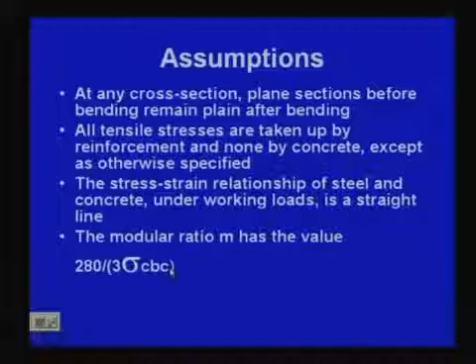The modular ratio M has the value 280 by 3 sigma CBC, where sigma CBC is the permissible bending stress in compression of concrete. So these are the 4 assumptions, and you can get them in IS 456 also.

I am not going into detail since I already listed this table in the last lecture. I've written it in complete form, and you will get it in IS 456 also. I have given only those values we generally use; most cases we use M20 and M25.

Permissible stresses in concrete are given for 4 grades, M15, M20, M25 and M30, covering bending compression, direct compression, and average bond stress in tension.

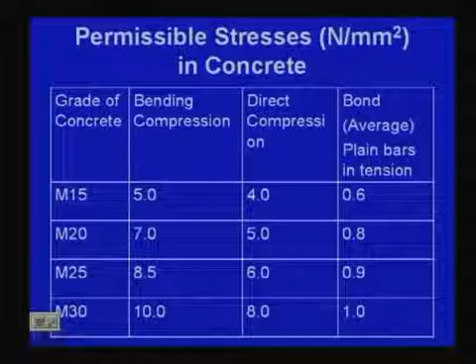Whatever the case, whether compression or high yield strength deformed bar, we have to apply a multiplication factor to get the required value. That is the standard procedure: we start with one value and multiply by a certain factor to get the required value, which I shall explain when we come across those problems.

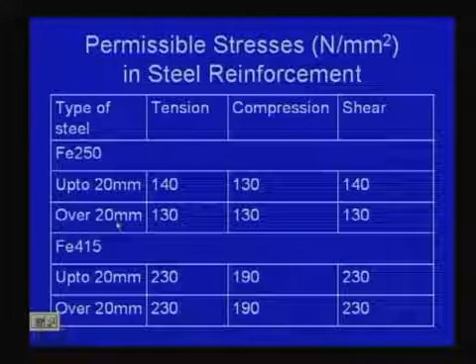For permissible stresses in steel reinforcement, this table also I have given, and you will find a difference particularly for Fe 250 mild steel: up to 20 millimeter diameter there is one kind of stress pattern, and over 20 millimeter diameter another. I already told this in the last class.

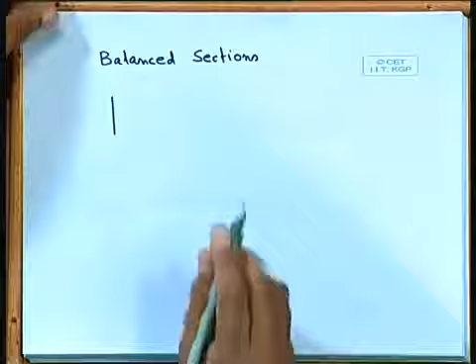Because we can find out the steel also. Let me go back to the few previous slides. Yes, so this is the one we are interested in.

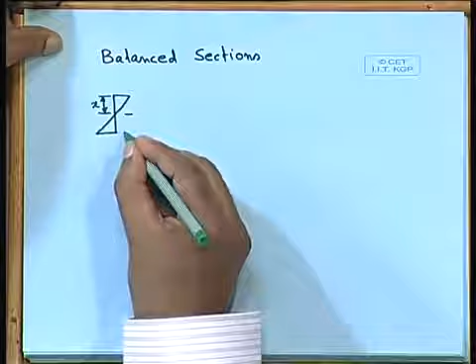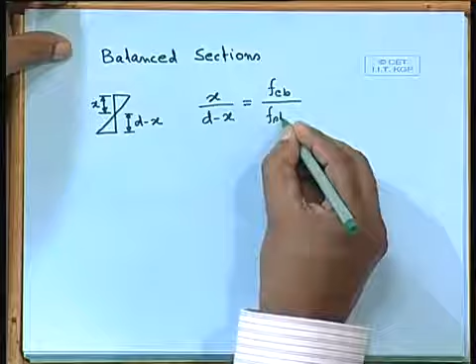So x and this one d minus x, this is x and this is d minus x. Now let us find out, or we can write down here also, at least for this page. We are talking about this x and this part, effective depth, d minus x. So we can write down FCB at the top, and we can write down KD, x equal to KD, so that I am writing here.

And M FCB by FST. So we can write down K equal to, let me make it, you please check it, because we are not going into detail of that calculation. And j equal to 1 minus k by 3. So for the balanced section we can find out k, that is kd. That means if we know FCB, FST, and m, obviously we can find out m equal to 280 by 3 sigma CBC. We should remember this one.

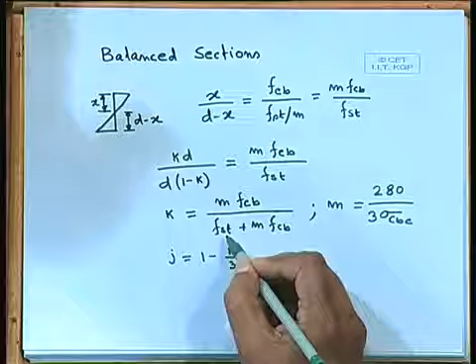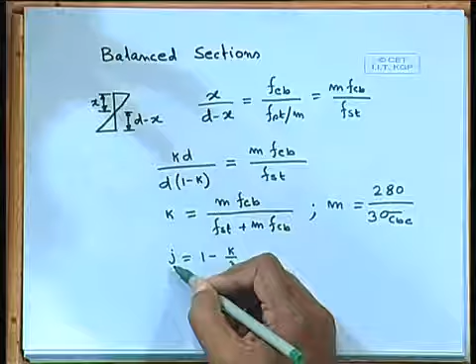FCB means sigma CBC and FST means sigma ST. So for a particular grade of concrete and a particular grade of steel, we can find out the value of K, and if we know K, then we can find out J also, and if we can find out J, then we can find out JD, and then we can find out the moment of resistance, all those things we can calculate. So here FCB, FST, those are limiting permissible values, and we shall get them from the code, because our code gives permissible stresses for a particular grade of steel, for a particular grade of concrete.

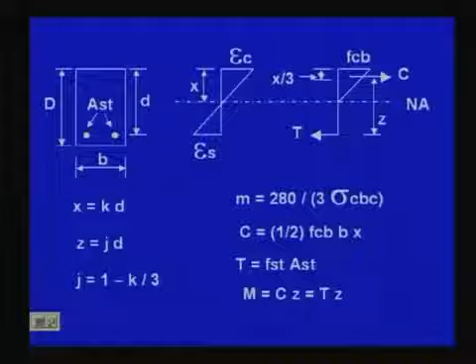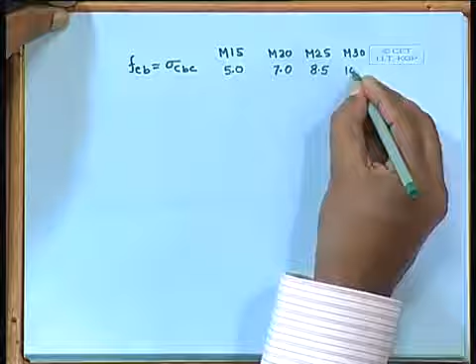So let us see, let us write down FCB equal to sigma CBC, and let us make it here for M15, M20, M25, M30: 5.0, 7.0, 8.5, 10.0. So these are permissible stresses for different grades of concrete.

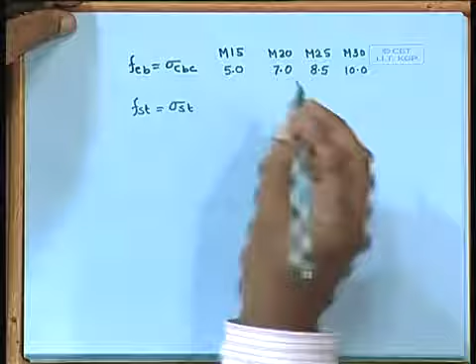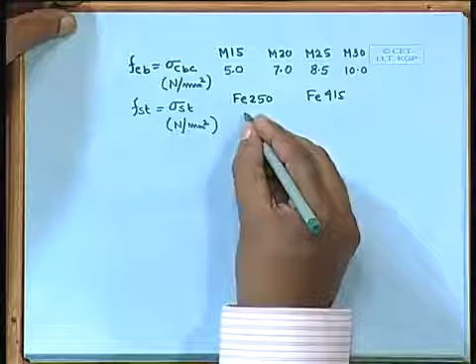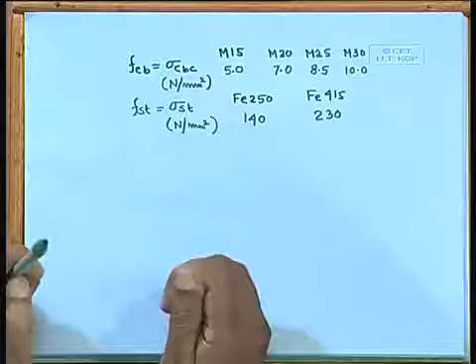FST for balanced section, it should be sigma ST. Let me complete this one with the proper unit, Newton per square millimeter. So for FE 250, FE 415, we have 140, we have 230. There is one more grade, that is FE 500, and that also we can use, but I am giving only those because you can get those other things in your code. In this particular class, if we cover each and every numerical value, it will be difficult to cover all those things. So we are only using the grade of concrete and steel which we generally use, and others, say FE 500, you can get in the IS code. So IS 456, you can find out, and there you can get the detail.

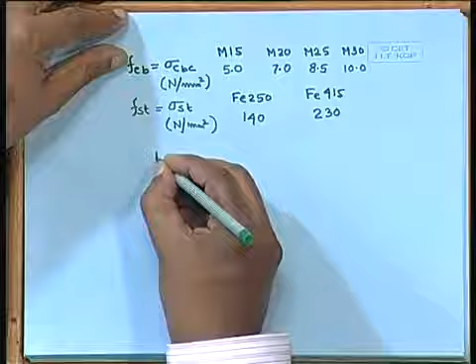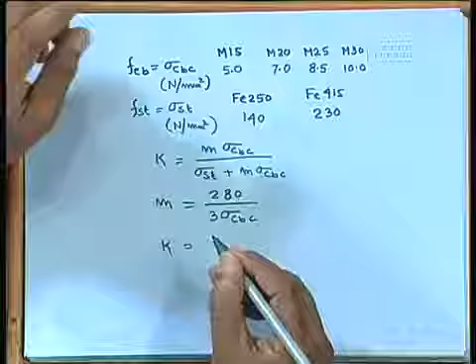So K equal to M sigma CBC divided by sigma ST plus M sigma CBC. I repeat once more, M equal to 280 by 3 sigma CBC, and K equal to, please note there is one more K that will come, that is capital K. But for this time we are only working on small k, that is KD.

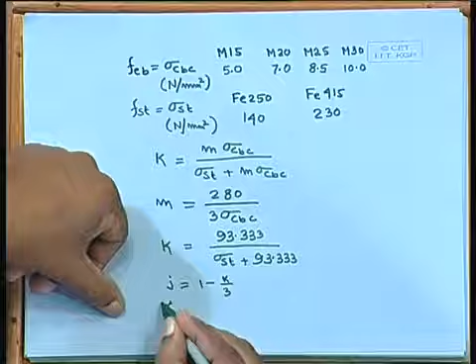So, that one comes as J equal to 1 minus K by 3, and capital K equal to Kj by 2, and moment of resistance M, that one will be equal to capital K sigma CBC B d square. So, m equal to capital K sigma CBC B d square.

This K, that is one factor. If you remember, for homogeneous rectangular section, in the last lecture we have found that is 0.167 times the stress times B d square. So, here also this capital K also we shall get similar type of fraction. So, let me go a little bit faster here.

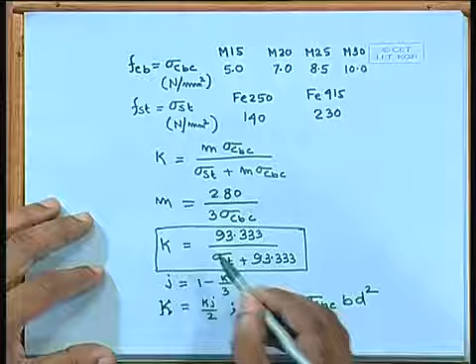Okay, so we can find out beam factors for Fe 250, that K we can find out for different grades of concrete. K you can find out that all of them having same, because for Fe 250 please note this equation: you will find it is independent of sigma CBC, it is independent of any concrete value, we are getting only sigma ST. So that is why for any grade of concrete you will get that K same, and you can calculate J, you can calculate capital K.

So, if we come back to this beam factors table, the small k, which is the factor of KD, from where you can get say 0.4 times small d, that effective depth. So, we shall get X, J which will give me the lever arm, and capital K, that coefficient you can get 0.174. So all of them we are getting 0.174, and this one for mild steel. So, this table for mild steel for Fe 250, and I have given only M15, M20, M25, 30 just to show that for all grades of concrete we are giving the same value.

Next one, that is for Fe 415. Fe 415 we are getting that K 0.29, J 0.9, capital K 0.131. So, this value you will get it say 0.167, the one we have told, and here you are getting 0.131, the other one you are getting 0.174. So, that means approximately, that is not a bad choice, one can also get some kind of result even if you consider homogeneous, but obviously it is not the correct one. So, the correct one is what we are doing now.

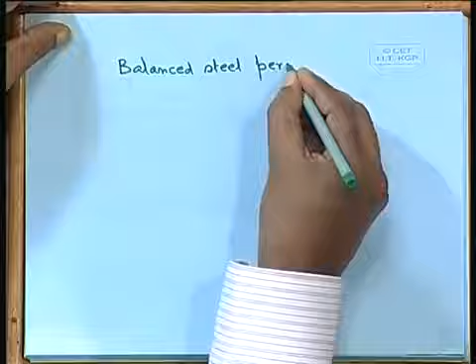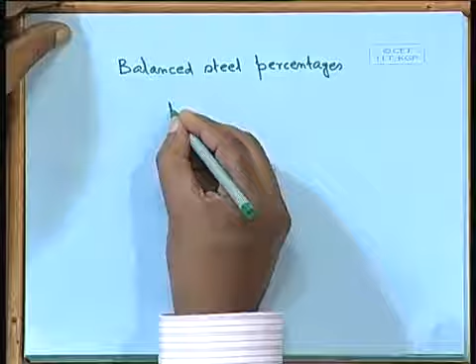So, if we say PT or P, whatever we consider, P equal to 100 AST by BD. This is the percentage of steel what we are considering, and so AST equal to... so we can equate forces.

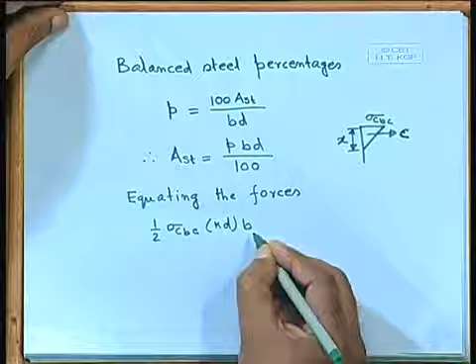Half sigma CBC times KD times B. This is the compressive force, B times X, that we are talking. So this is the force C, and this is sigma CBC, this one X, width of the beam that is B. So I can get capital C half sigma CBC KdB, x is nothing but Kd. That we can get, which should be equal to P by 100, we are talking percentage of steel, P by 100 BD times sigma ST. So, this is the area of the steel times sigma ST will give me the tensile one, this is the tensile force T.

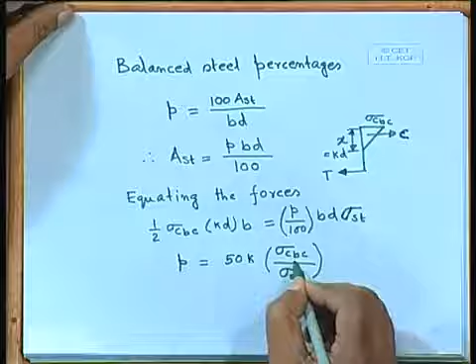So, from here what we can get, P will be equal to 50 K times sigma CBC by sigma ST. If we just rearrange it, so P percentage of steel will be equal to 50 times K sigma CBC by sigma ST. I know that K, so I can calculate that balanced percentage of steel. So I can get the balanced percentage, because this sometimes required that you can approximately find out also, considering sigma CBC and sigma ST, you can find out K, and then immediately you can find out that P also.

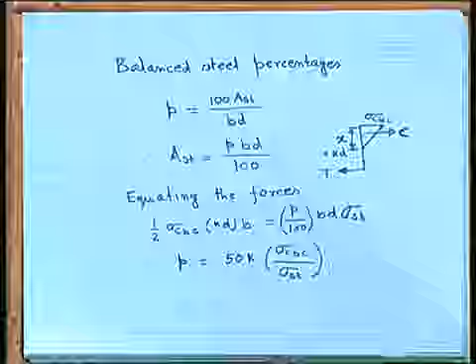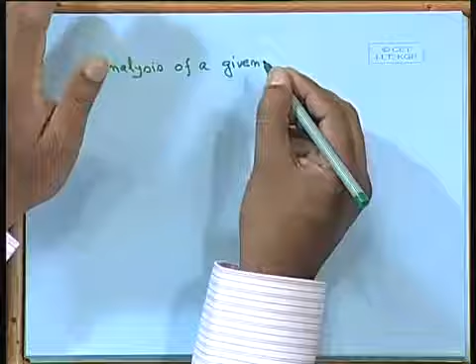Analysis means that when the section is given - reinforcement, depth, width, everything given - then we call it analysis. We are analyzing how much load it can take, what is the moment of resistance. Design means your moment is given and you have to provide the suitable section - that is called design. So here we are doing the analysis of a given section.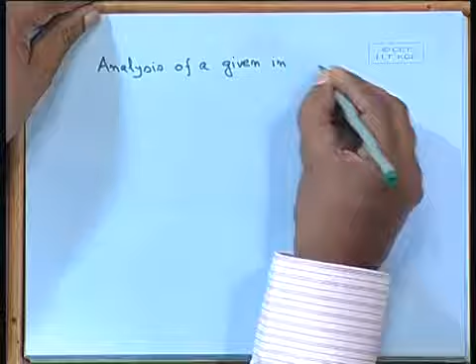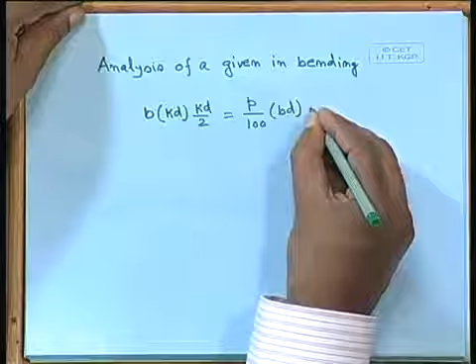We are talking bending only. So we can take the moment about the neutral axis, so this one we are taking. What we are doing is considering the neutral axis somewhere here.

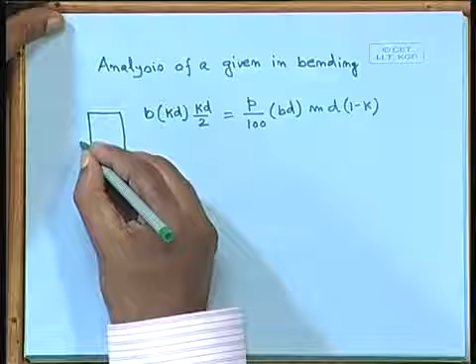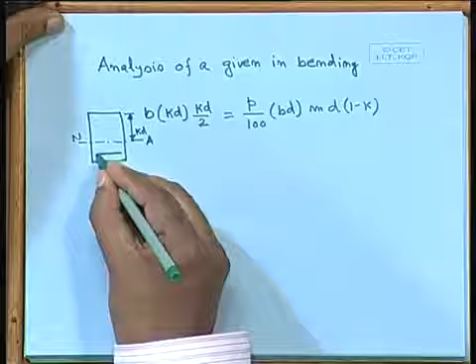This part is kd, area of steel somewhere here, and that distance is d minus kd.

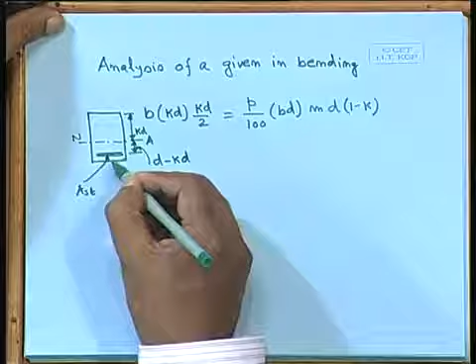So this area of concrete, we can get the area B times kd by 2. I am taking the moment of this area with respect to this neutral axis, because we are considering that equivalent section.

That is why you multiply - this is the area of steel, P is the percent of steel, P by 100 times BD, because we consider percent of steel with respect to the width and the effective depth. Please note width times effective depth, not the overall depth, because there is another term, capital D, called overall depth, but we are not considering overall depth.

Whenever we consider the percentage of steel of a particular section, we take B times D. So B times D multiplied by P by 100 gives me the area of steel, multiplied by m gives me the corresponding equivalent concrete section, similar to any composite section, like wood and steel bar which you have done in first year class.

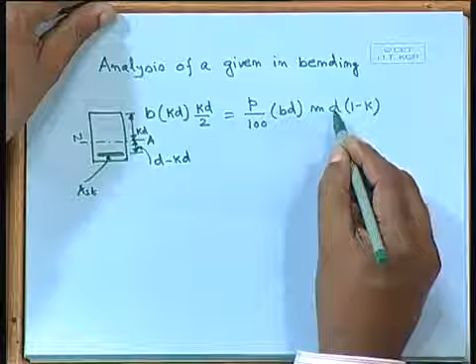Either you make that steel bar equivalent to wood area, or consider wood as steel. So wood will become thinner, but if you convert steel to wood, it will be bigger. Here we are considering the same way, multiplied by d times 1 minus k, that is the distance, and we shall get this equation.

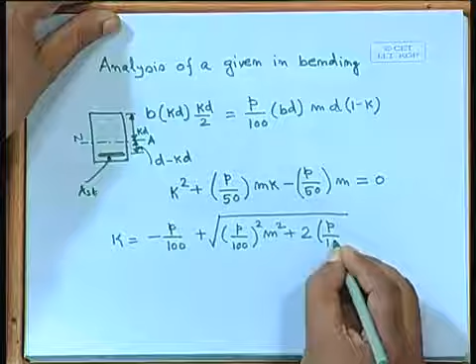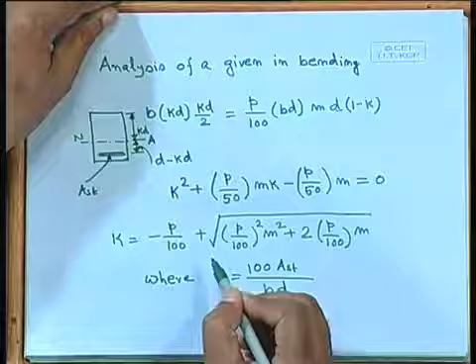From there we can find out k square, and as done in the last class, k equals... last class we called it the reinforcement index, and here we are talking percentage of steel, where P equals - we can write down P equals 100 AST by BD, and from there we find the corresponding K. If area of steel is given, we can calculate that K.

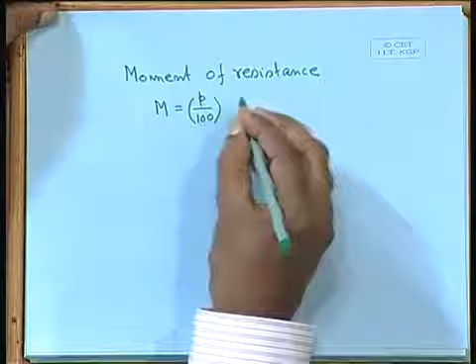So we can just repeat the moment of resistance. Let me write down moment of resistance: M equal to P by 100, B D sigma ST, D times 1 minus K by 3.

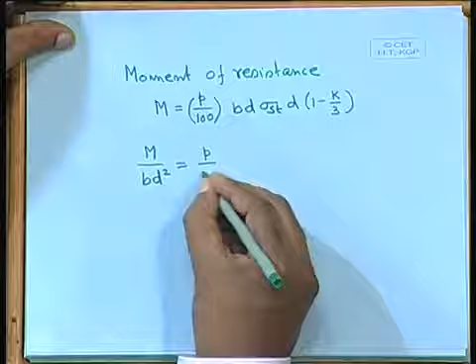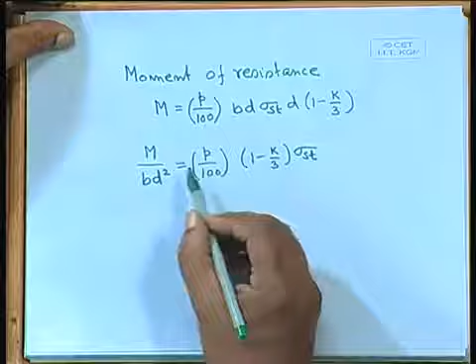Also we can write it in this way: M by BD square equals P by 100 multiplied by 1 minus K by 3, sigma ST. So generally in SP16, or any design aid, or you can make your own, we use this equation which is independent of B and D.

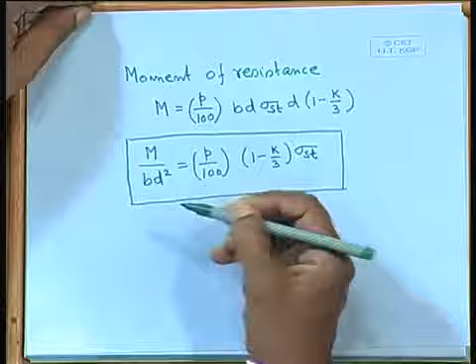We can get a curve or make a table, giving P for a particular grade of steel, and for different percentages of steel we can find the corresponding M by BD square. We can make those things ready and use them immediately, making the design process faster, since every time you need not use a calculator or computer. So you can make curves or tabular form, and immediately choose your section.

Okay, now let us do one problem. I hope we shall be able to finish it.

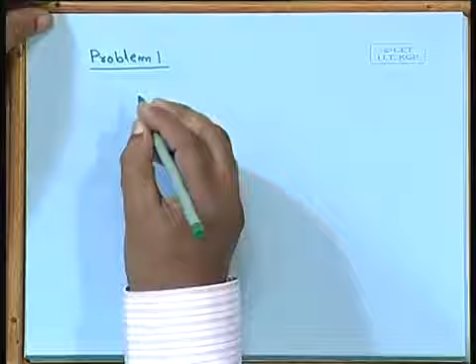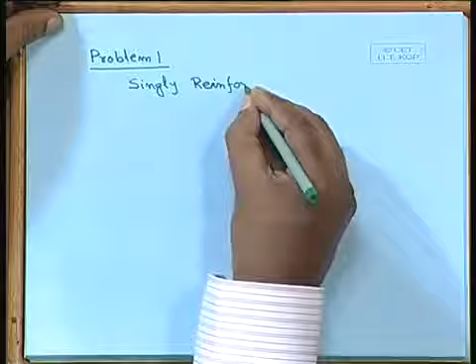Let us describe the problem first. Singly reinforced - please note, I have already mentioned the term singly reinforced, that means single. So there should be a term for something else, generally we have double.

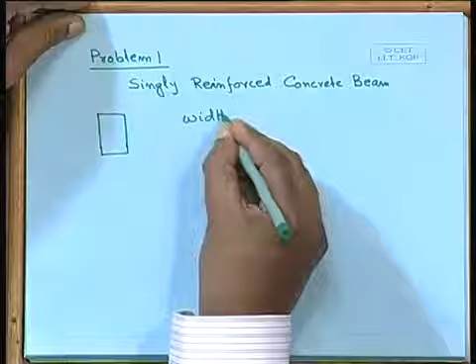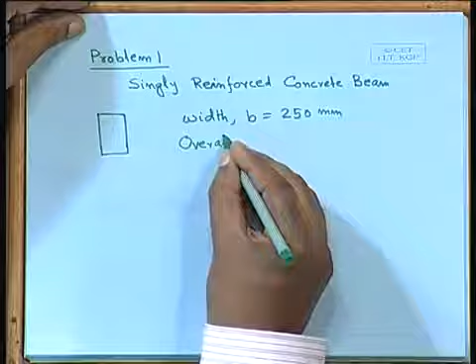So we are having one beam, width B 250 millimeter, overall depth 400 millimeter. Let us put it as capital D.

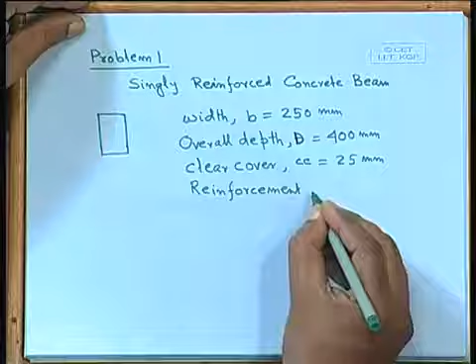Clear cover we shall consider, say CC 25 millimeter. Reinforcement phi - we designate phi, which if we specify phi, that means we are considering mild steel. There is one more actually, that I shall tell you in due course. And Fe 250 and M20 grade of concrete.

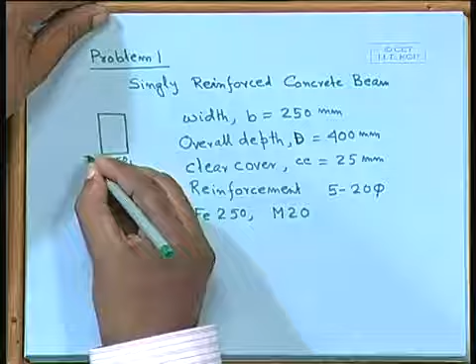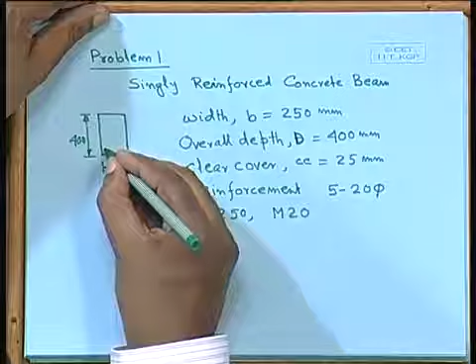So this is the description of the problem. This is 250, overall depth 400. There are 5 bars, 5 bars of 20mm diameter. So this is the problem we have to solve.

So sigma Fe 250, phi 20 millimeter, sigma St - it is up to 20 millimeter, so we have to use 140 Newton per square millimeter, not 130 Newton per square millimeter.

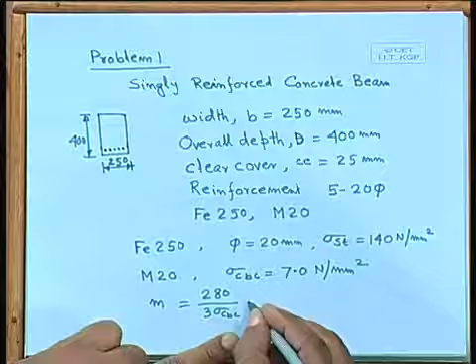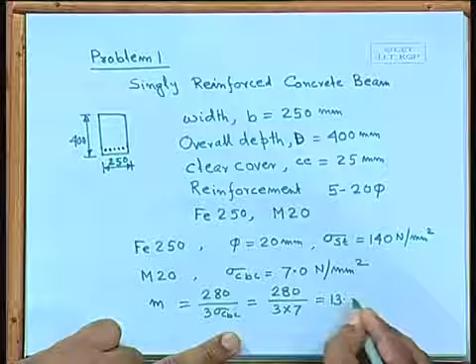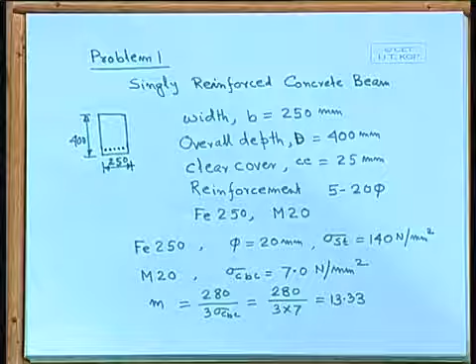M20, sigma CBC. So always you should write down first the values whatever you require, and M equal to - so we know M, sigma St, sigma CBC. So shall I continue with the next step? I think I can change it.

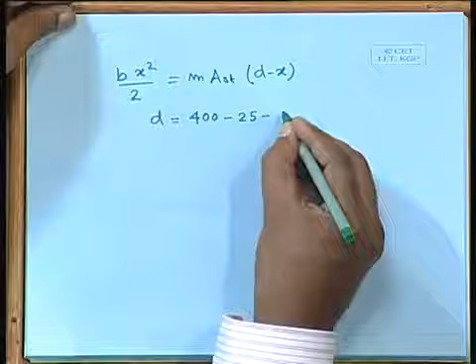b x square by 2, d equal to 400 minus 25 clear cover, 20 by 2, which comes as 365 millimeter. So 250, m is 13.33.

Area of steel, let us calculate here. Five, pi by 4 into 20 square equal to, so 5, that comes as 1570 square millimeter.

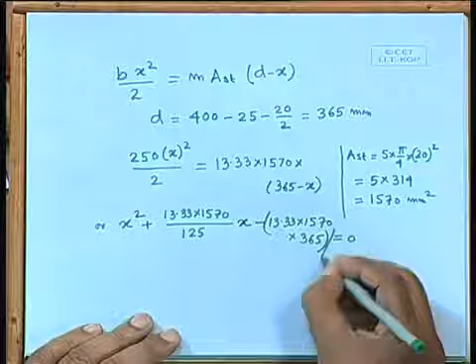Or x square plus 13.33 into 1570 divided by 125 times x minus, so I think I have to calculate it, divided by 125. Okay, or x square plus, which is coming as 167.42 x minus 13.33 into 1570 into 365 divided by 125, which is coming as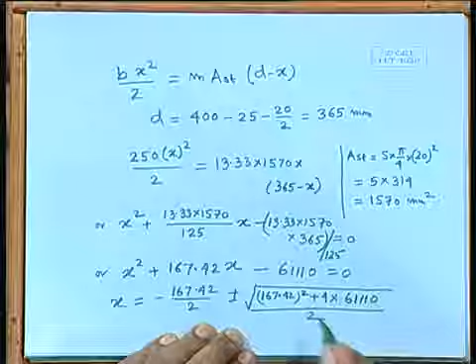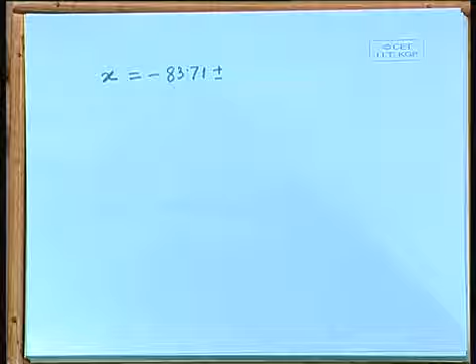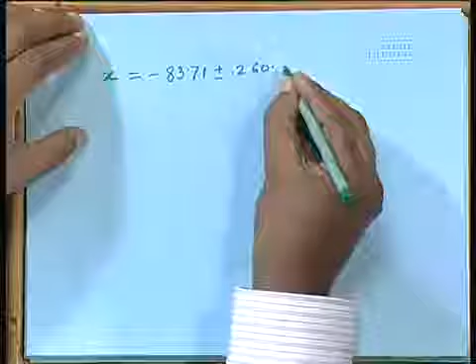So x will become 261 minus 83.71. So 177.29 millimeter. Okay.

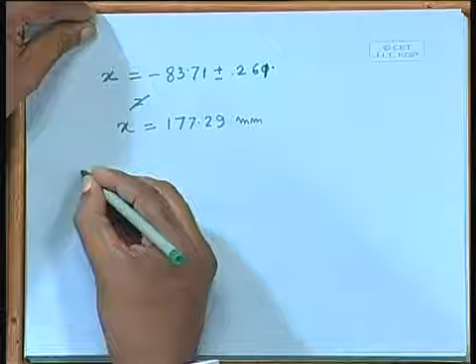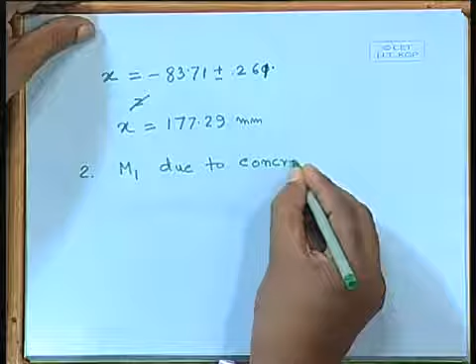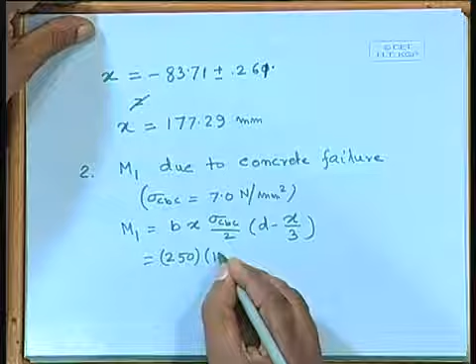So we can write down M1 due to concrete failure, sigma CBC equal to 7.0 Newton per square millimeter. M1 equal to B x sigma CBC by 2, d minus x by 3, equal to 250, 177.29 times 7 by 2, 365 minus 177.29 by 3, equal to

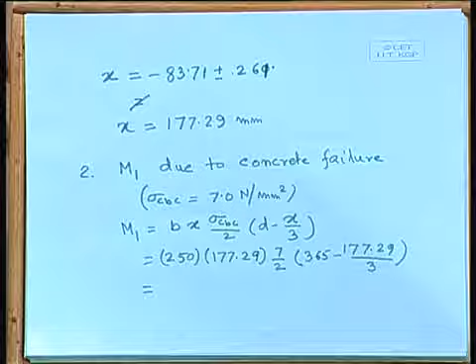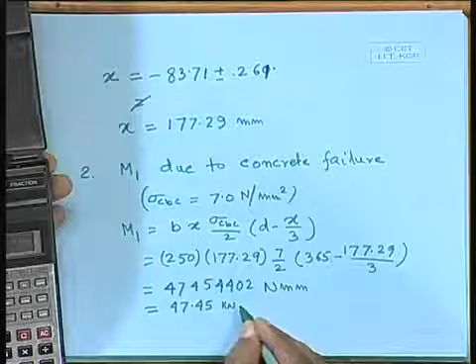5 minus 177.29 by 3. So 305.9 into 7 by 2 into 250 into 177.29. So which comes as 47454402 Newton millimeter, which comes as 47.45 kilonewton meter. We get 47.45 kilonewton meter.

That is due to concrete failure. So we have to get the other one. So we can get it, the other one. So M2 due to steel failure. Here sigma ST equal to 140 Newton per square millimeter.

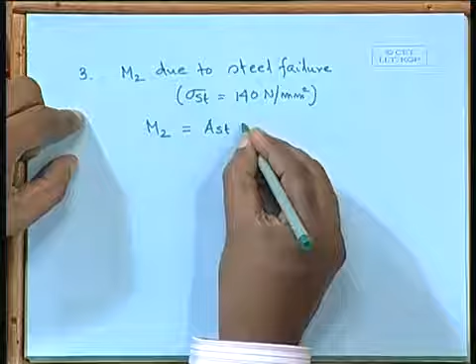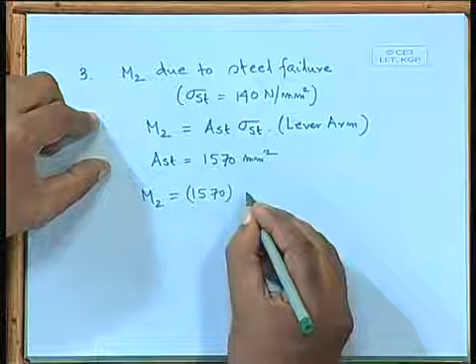M2 equal to AST multiplied by sigma ST multiplied by lever arm. AST equal to 1570 square millimeter. M2 equal to 1570 multiplied by 140 by 365 minus what was the lever arm, that 177.29 by 3, which comes as

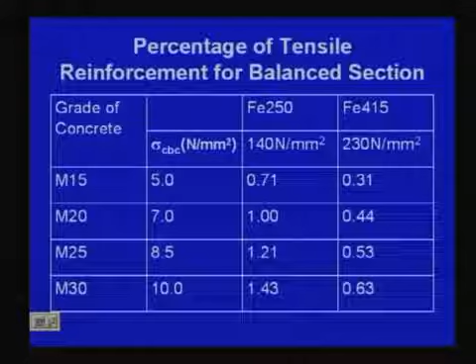So we are getting 67237553 Newton millimeter equal to 67.23 kilonewton meter.

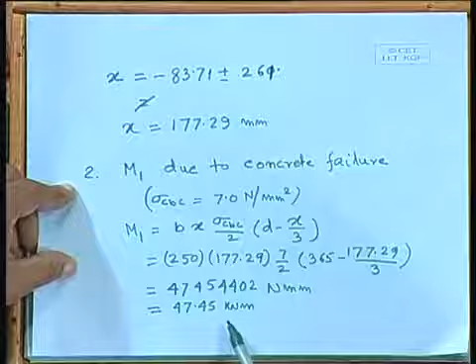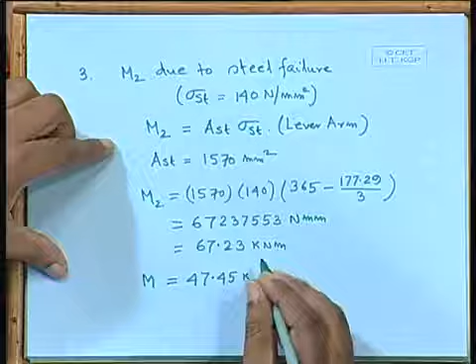We have got M1 due to concrete failure 47.45, and here we are getting due to steel 67.23. That means moment of resistance M will be equal to 47.45 kilonewton meter. It will be governed by concrete. That means it is an over-reinforced section. So if we go by concrete, that is not a desired choice. So that means you can reduce your reinforcement and find out your optimum section.

So we shall conclude with the working stress method, just to give an idea, and we shall compare with the limit state method also, but mainly from now on we shall work on limit state method. So in the next class we shall start limit state method. Okay, thank you.